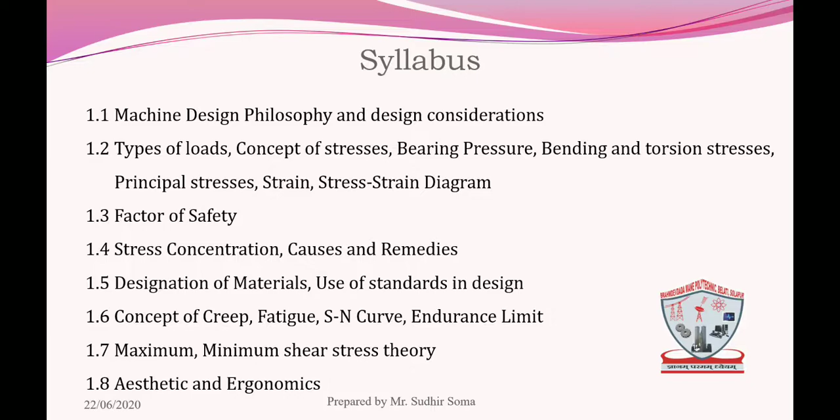So, students, what is meant by machine design? Machine design is the process of selection of the material, shape, size and arrangement of mechanical elements so that the resultant machine will perform the prescribed tasks. Basically, you know what is meant by machine. A machine is a combination of linkages having definite motion and capable of performing useful work.

The philosophy of machine design comprises three major parts, that is input, process, output. Input means consisting of a number of principles, then process includes operational discipline resulting in action, then finally a critical feedback instrument which measures the advantages, reveals the shortcomings and illuminates the direction of improvement.

Also, the philosophy of machine design is based upon the general principles derived for engineering design, that are need, physical realizability, economic viability, design criteria, design process, reduction in uncertainty, future design decisions, communications.

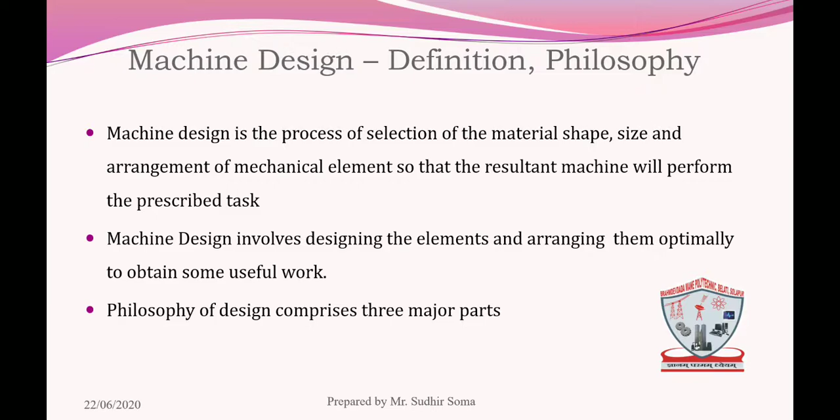Then in the next slide you'll see the different phases of design. It includes aim, that is the objective, synthesis, analysis of forces, material selection, design of element, modification, detailed drawing, and finally production.

So, the design process starts with identification of need and a decision to do something about it. After a number of iterations, the process ends with the presentation of the plans for satisfying the need. Depending upon the design task, several phases may be repeated before the finalization of design. These points are explained in the figure, the complete design procedure, which shows phases of design and iterations.

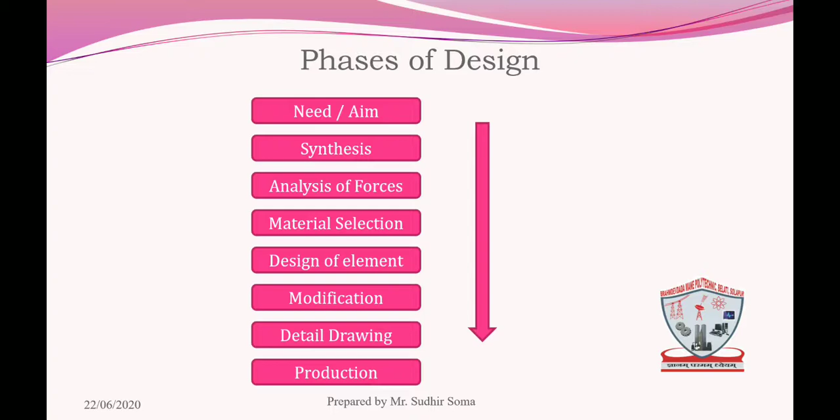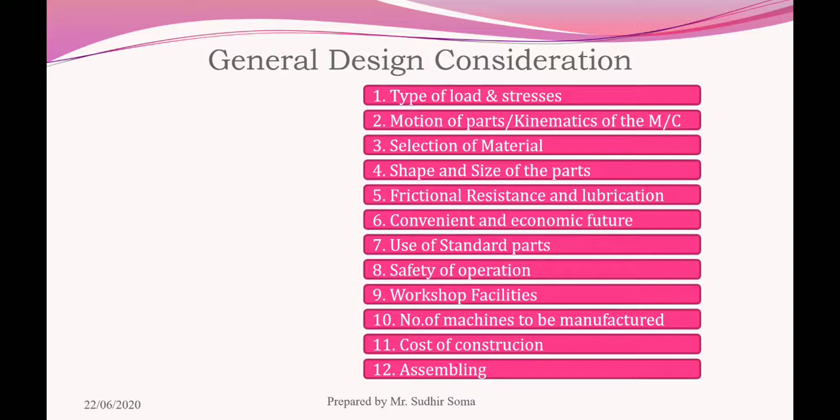Then the next slide indicates the general design considerations. So what is meant by design considerations? While designing any component, strength and stiffness are very important factors considered in machine design. But there are a number of other considerations that the designer has to keep in mind while designing any product.

Some of the important factors considered in design, step by step, are: type of load and stresses, motion of parts, selection of material, shape and size of the parts, frictional resistance and lubrication, convenient and economic features, use of standard parts, safety of operation, workshop facilities, number of machines to be manufactured, cost of construction, assembling.

So, what is the type of load? Various types of load act on the machine component, and due to this internal stresses are set up. These types of loads are steady load, fluctuating load, repeated load, etc. So what is motion of parts? Successful operation of any machine depends on the arrangement of the parts which transmit the required motion.

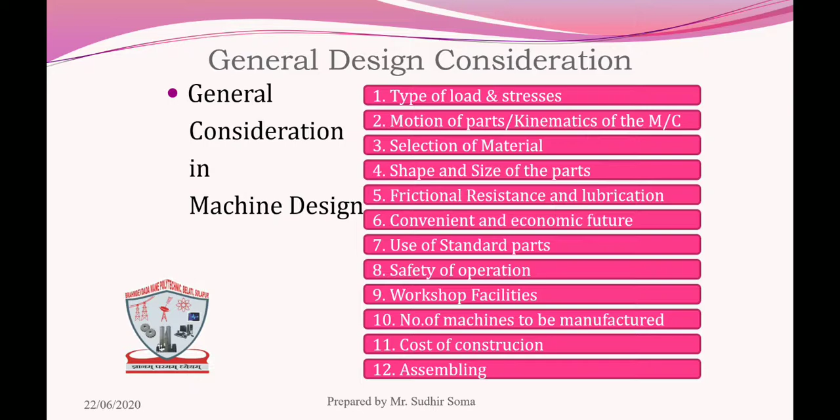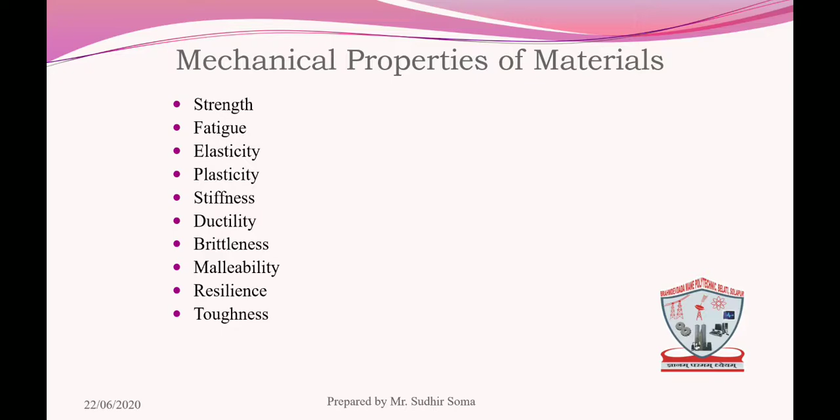Then we will discuss mechanical properties of materials. You know, strength, fatigue, elasticity, plasticity, stiffness, ductility, malleability, hardness, resilience, toughness, creep. We will discuss these properties one by one.

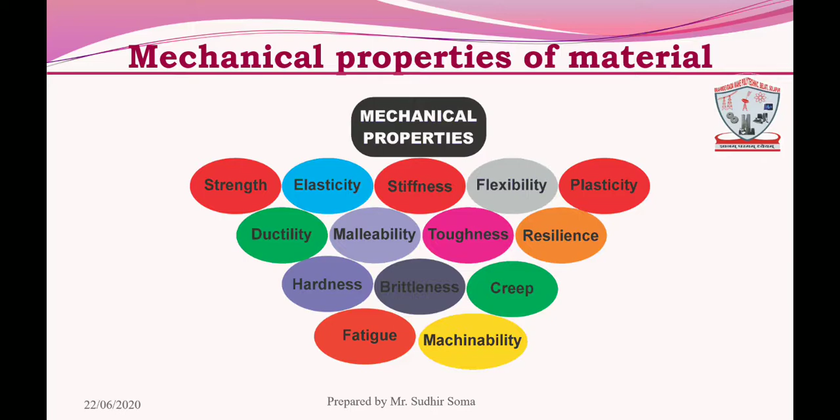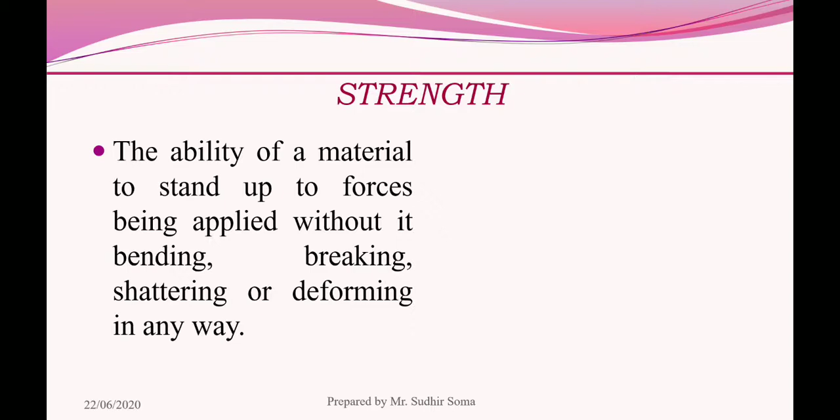So, what is meant by strength? Before that, we have to study the mechanical properties of metals. The mechanical properties of metals are those related to the behavior of the material in resisting mechanical forces and loads. These properties help in designing machine components in various sizes and shapes to fulfill the design conditions. So what is meant by strength?

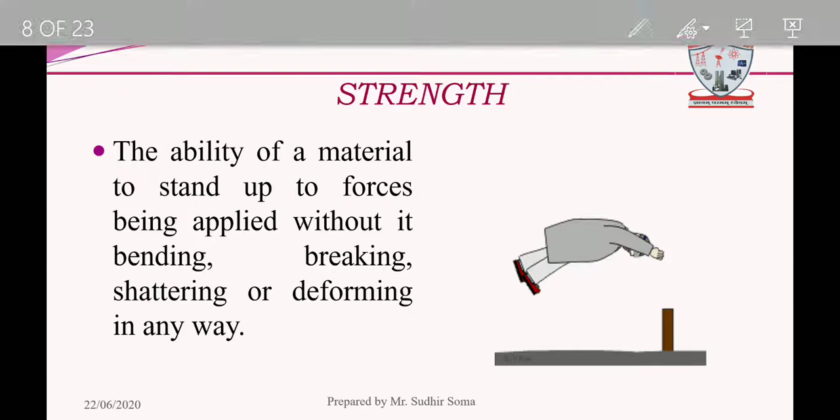Strength, that is static strength, is the ability to resist stress without failure under static loading. It is the ability of a material to stand up to applied forces without bending, breaking, shattering, or deforming in any way.

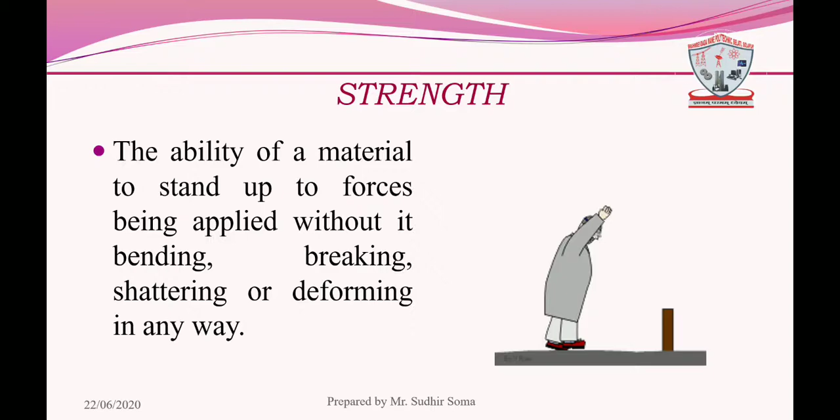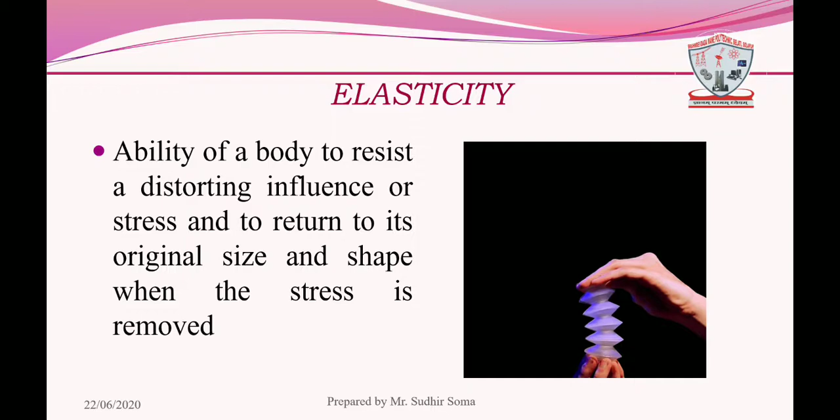Next, elasticity. What is meant by elasticity? It is the ability to regain original shape and size after load removal. It is the ability of a body to resist a distorting influence or stress and return to its original size and shape when the stress is removed. Then what is meant by plasticity?

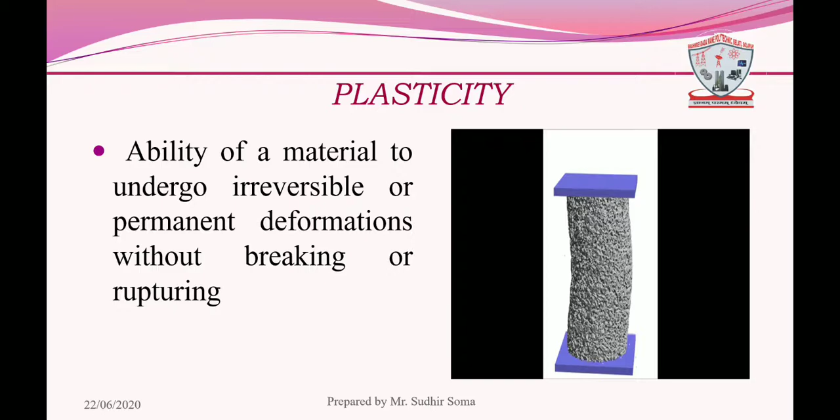You see the animation. It is also the ability of a material to undergo irreversible or permanent deformations without breaking or rupturing. Then next is ductility. So what is meant by ductility?

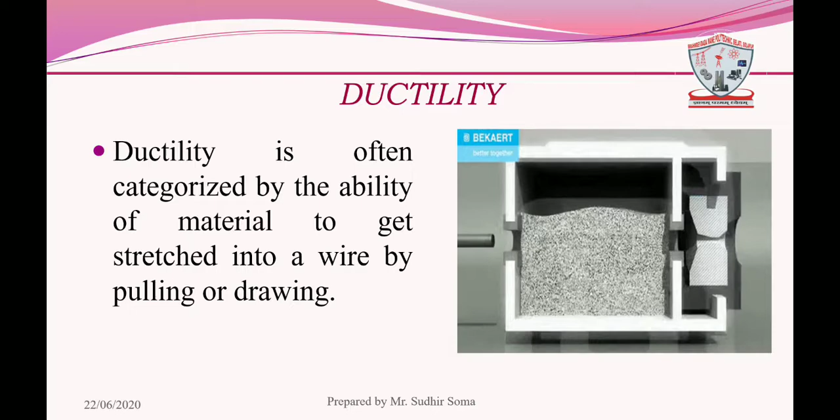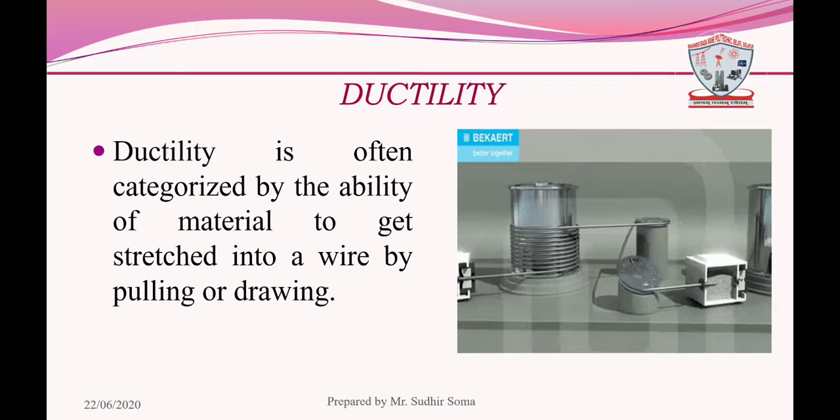The animations clearly tell about this property of material, that is ductility. It is often characterized by the ability of a material to get stretched into a wire by pulling or drawing, it is elongated.

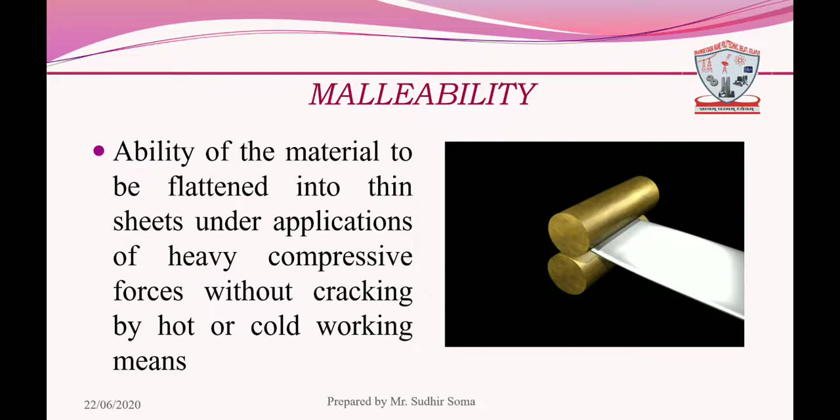Then next, malleability. It is the ability of the material to be flattened into thin sheets under application of heavy compressive forces without cracking, by hot or cold working. It is the property of a material which enables it to undergo change in size and shape without rupture under the application of external load. It's called malleability.

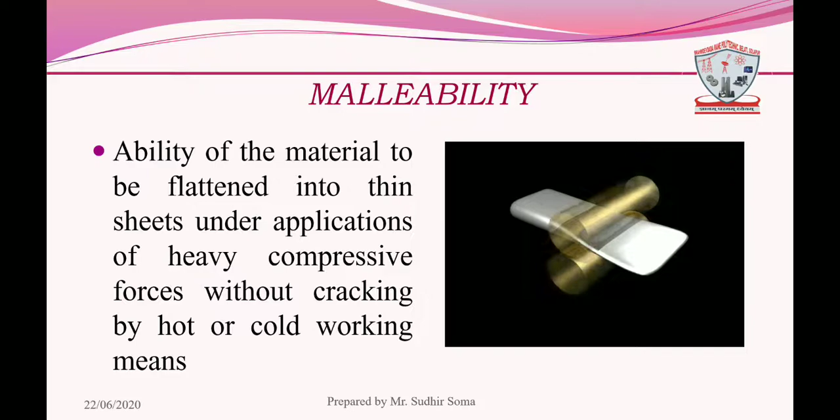The next, brittleness. It is the ability to rupture with negligible deformation. Meaning, brittleness of a material indicates how easily it gets fractured when it is subjected to a force or load.

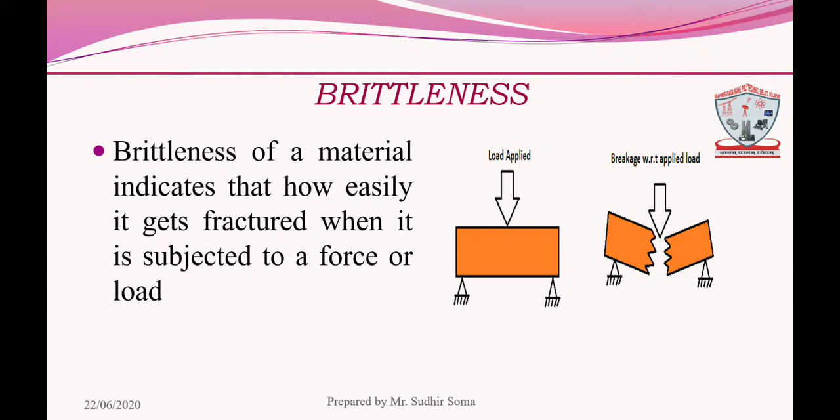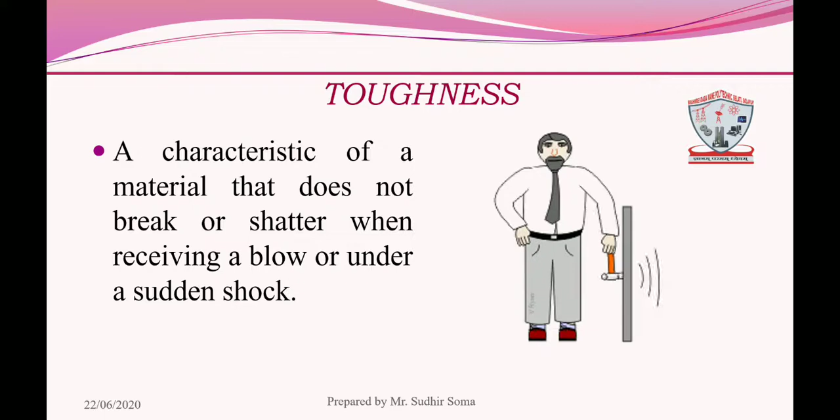Then toughness. So what is meant by toughness? Obviously it is the capacity to absorb energy without fracture. The animation shows it is a characteristic of a material that does not break or shatter when receiving a blow or under a sudden shock.

Then hardness. So what is meant by hardness? Resistance to penetration, abrasion or plastic deformation. It is the ability of a material to resist scratching, wear and tear, and indentation.

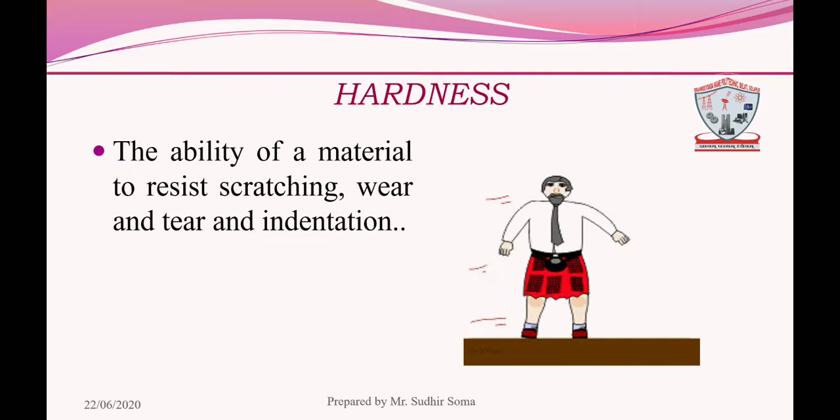So next is stiffness. It is the ability of an object to resist deformation in response to an applied force.

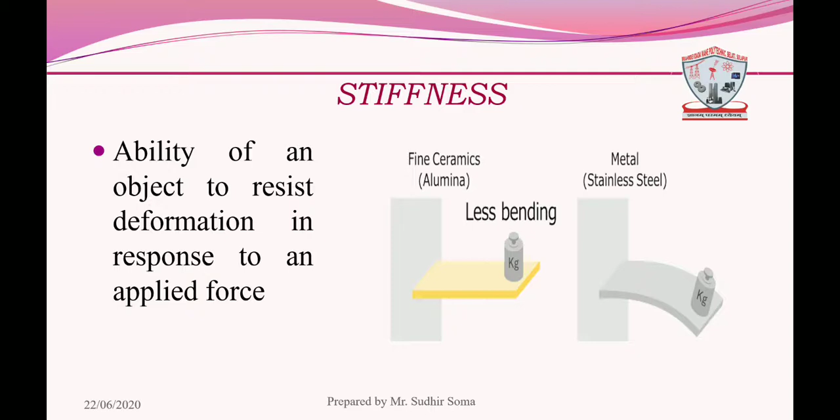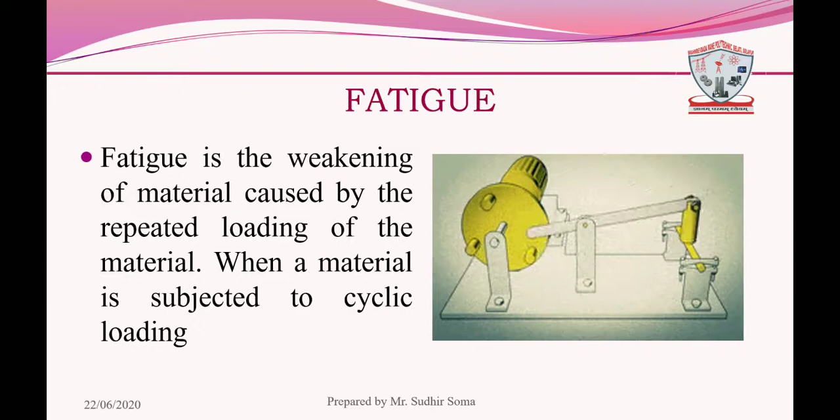Then next, what is meant by fatigue? Fatigue is the weakening of material caused by the repeated loading of the material, when a material is subjected to cyclic loading. It means when a machine component is subjected to repeated stresses, it fails at stresses below the yield point stresses.

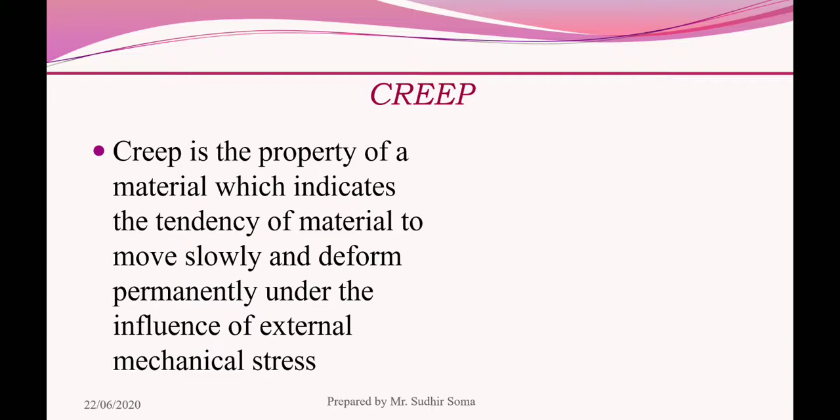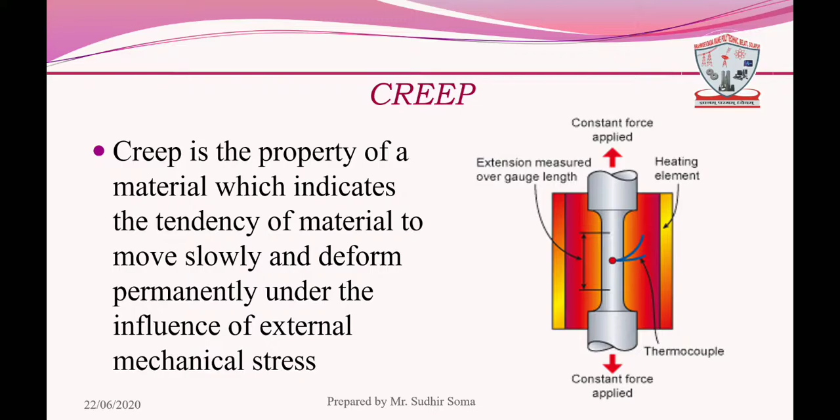The next, what is meant by creep? Creep is the property of progressive deformation under load at high temperature. It is the property of a material which indicates the tendency of material to move slowly and deform permanently under the influence of external mechanical stress.

So what is meant by resilience? Obviously it is the capacity to absorb energy when deformed within the elastic range. It is the ability of a material to absorb energy when it is deformed elastically by applying stress, and release the energy when stress is removed. You see the resilience.

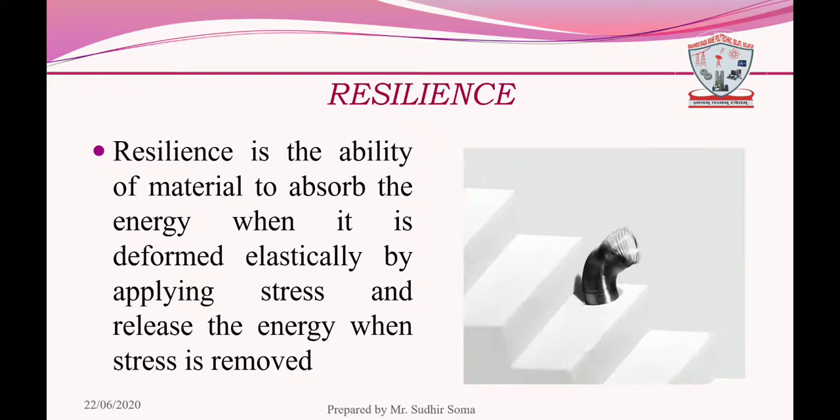Then one of the most important factors, that is the types of loads. The mechanical component is subjected to various types of external loads that may be acting because of energy, torque or power transmission, their self-weight, frictional resistance, inertia or centrifugal forces, or due to temperature gradient.

These static or dynamic loads cause bending moment, torsion moment in the component. The loads are basically classified into four categories: steady load, fluctuating or variable load, and suddenly applied load, that is the shock load or impact load.

So what is meant by steady load? It is the type of load which does not change its intensity and direction of applied load. Fluctuating load means, as you know, it is said to be variable load. Obviously it changes continuously.

So suddenly applied load, that is the shock load. It is the type of load which is suddenly applied and rapidly builds up stress in the component. For example, this type of load, shock load, is seen in the leaf spring of a vehicle.

So what is meant by impact load? The instantaneous arrest of a falling mass, or shock load meeting two mating parts. Meaning, for example, blows of a hammer, impact of a punching machine operation.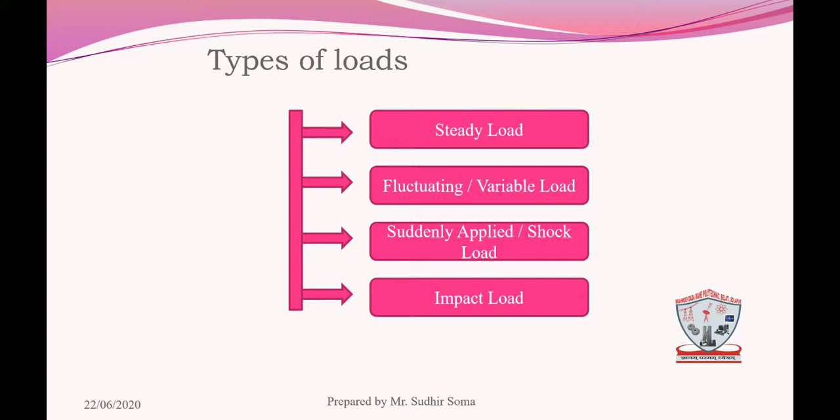Okay, so what is meant by stress? As you know, when an external force is applied on a body or component, some internal forces are set up in the body which resist the external force. This is known as stress.

Strain, so stress is obviously the ratio of force upon area. Strain is the change upon original. Meaning, whenever a force acts on a body or component, it undergoes deformation per unit length.

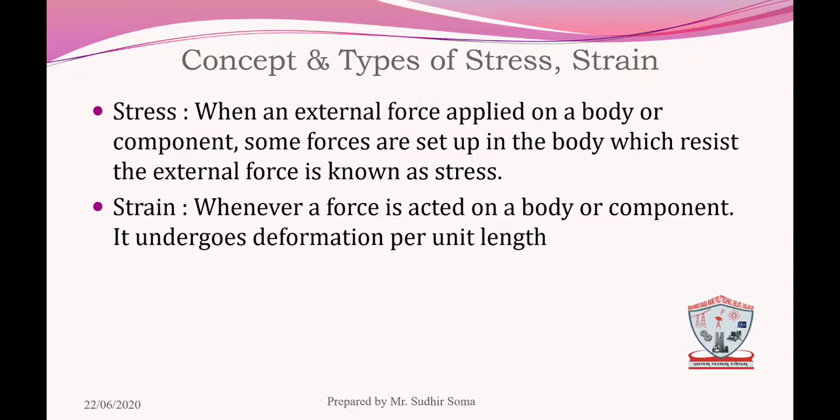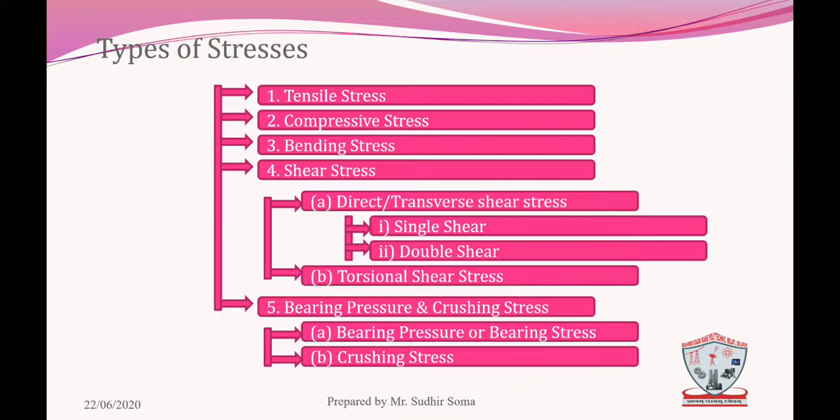When a mechanical component is subjected to equal and opposite axial force, called axial tensile force, the stress induced in it is called tensile stress. Obviously you know compressive stress: when a mechanical component or element is subjected to two equal and opposite axial forces that are push in nature, then the stress induced in it is called compressive stress. You should know about these types of stresses.